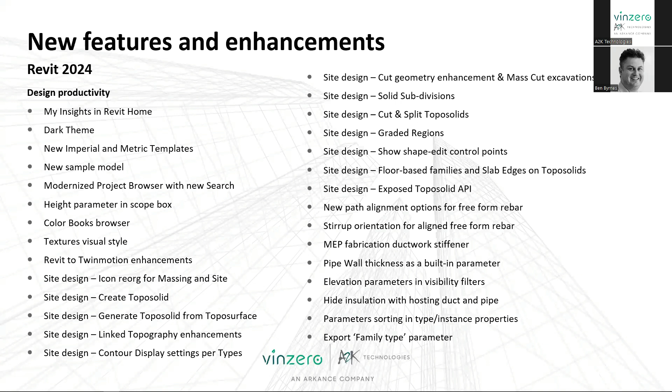One of the main things is the site design. We're now introducing in 2024 topo solids, which is a great feature. Now we're not really just dealing with those surfaces and then trying to put in cross sections, etc. We now have a fully modeled topo solid, which you can cut out shapes of, etc. It actually does real well in measuring those cut and fills as well now, so you can really get those volumes out accurately. Yeah, plenty of stuff there.

Simulation analysis, so a lot really to do there, I won't really touch too much on that. A lot of improvements in the MEP, like all your loading and stuff like that. Also a really big focus on the energy and sun settings and stuff like that, so a lot of that Naviz stuff, which I don't really go into too much. And cloud data - it works better with models, etc. You can actually point snap for those coordination models and stuff like that.

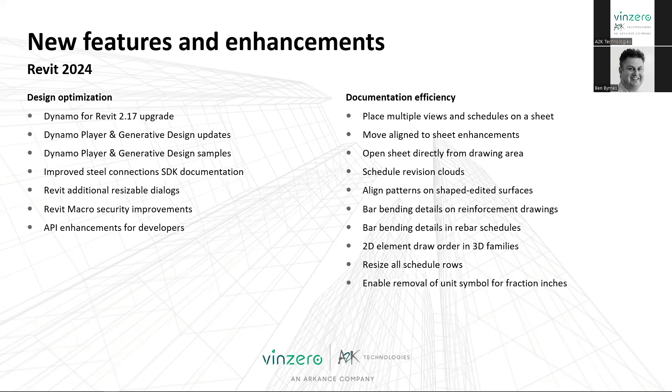Dynamo has improved again, it always does. It's open source software, pretty fluid. The steel connections are better than they have been before, and a lot of improvements in the reinforcement as well.

So a lot of that bar bending and so on can now be added in. Going into a little bit more detail, this is what I was touching on about those insights in Revit Home. On the home screen, you can really get those personalized insights on what you're doing.

You can see there, it shows a little graph of, okay, you spend 20% of your time doing model stuff. And so it really tries to improve your knowledge as well.

One thing that I love in the new Revit is they've actually got new sample projects, and the new sample projects really show a lot of best practices, and they do have a lot of learning resources in the actual sample projects. So I definitely recommend checking them out.

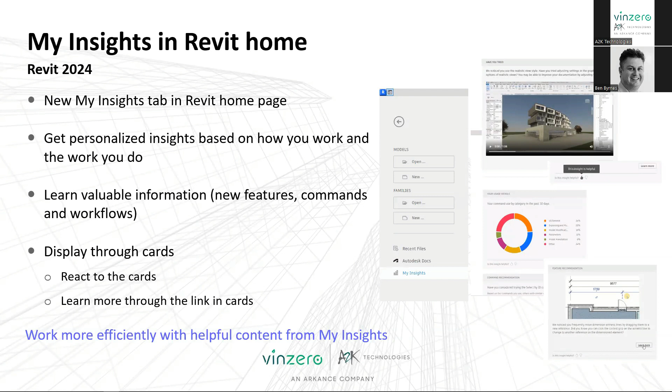The dark theme - as you can see there on that little screenshot, you can pretty much make it look like AutoCAD, which, to be honest, is probably a lot better on your eyes than the stark white. Sometimes I change it to gray, like have a very light gray in it. But yeah, the dark theme's quite good.

Probably should have been something they had 5 years ago, to be honest. I probably would prefer it, but I'm probably a bit too set in my ways to go for it. But yes, it does have the dark theme, which is great, and to be honest, it's probably about time.

They've modernized the icons as well, which when you do open 2024, it's one of the first things you notice. You go, well, this looks a little bit different. All the icons have sort of just changed very subtly, but it does look a fair bit different. It's a lot more modernized, as they say.

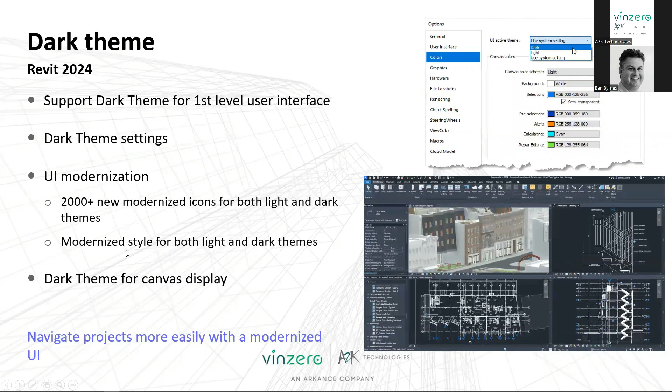New sample model - so this is what I was just talking about. The new sample model and project templates do have that multidisciplinary data set. So you've got an architectural data set, a structural data set, all based on the same project.

As you can see there, it's quite a good little infill site, which does actually have some existing facades and stuff like that, and a new bit. It's even got a point cloud in there. So it's a real good sample project, to be honest. I'm still exploring some stuff in it. It's great, it's sort of got everything in there, really good best practices and stuff like that.

So yeah, it's got the full set of documentation and guided tour, and it does have the imperial and metric templates as well. And like it says here, it does sort of allow you to discover those best-in-class BIM practices. There's no hiding in view, for instance. It's a very well done project. Of course, people do have some slightly different ways of doing things, but it does really show those best practices.

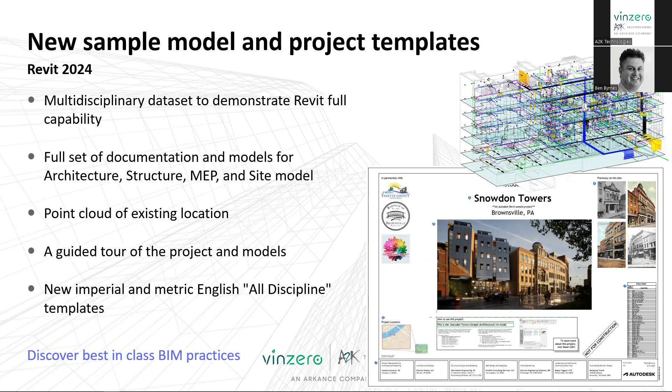The modernized Project Browser with new search - so it does have the search at the top, which is a little bit more accessible. For those of you that are quite familiar with Revit, I'm sure we all know how to right click and search, but I think it used to be almost like a hidden little feature. You'd sort of show it to people and they weren't aware of it. Where now it sort of does have that really at the top.

And if you're not using search in it, use it now. It does make life easier, particularly when you're looking - I always find it's useful for when you're looking for the embedded families that are sort of in the title blocks or the view titles themselves. If you're trying to look for that exact family name to then go in and change the font or whatever, that's where you really use it. So the search feature is really good.

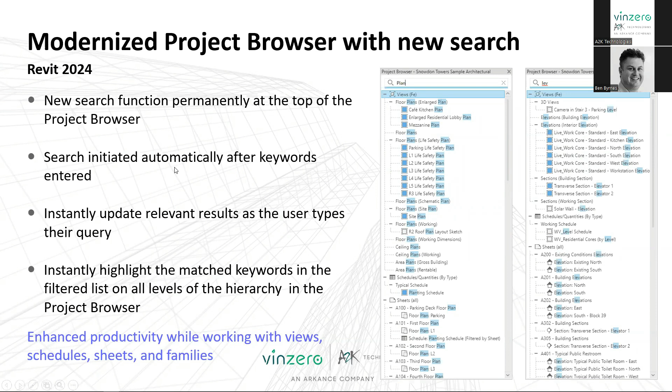Site design topo solids - this is one of the major improvements. There's no more building pads. So for those of you that have always had that frustration with building pads and trying to do surfaces, using surfaces instead of solids, the topo solids is one of the main improvements.

As you may or may not be aware, there is a hack if you do have that - you can't now do building pads anymore. That feature has been turned off now with the topo solid feature. But you can always, if you do have an old project, bring that in or use that, and you can always create similar to sort of hack that. So you can still create a building pad, but with the new topo solids, you wouldn't need to.

Do reach out, we do have a bit of a white paper on how to use topo solids and how to really get that benefit from them. It's much better. It takes a little bit of getting used to. It just works like a normal mass, I suppose.

It's a great new feature.

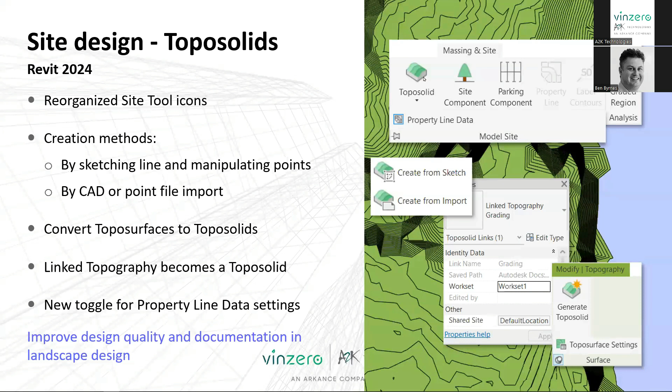Topo solids properties work very similar to walls. You can put in the grass layer, the gravel, then the earth, and then start to cut through that. You can draw sections and it will show that as well, so you can build that compound type topo solid with a layered structure, and you do get the slope, the volume, etc.

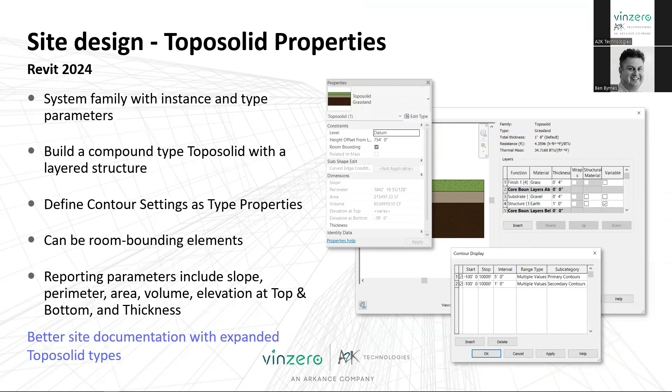It probably goes more into the cut and splitting of these solids on the next slide. As you put in your tunnel or your cut, the building pads are now retired, but you can still edit the boundaries of it. You can cut it with walls, floors, structural foundations, etc., and you can still use the split tool, similar to what we did with surfaces, to separate that into the separate elements.

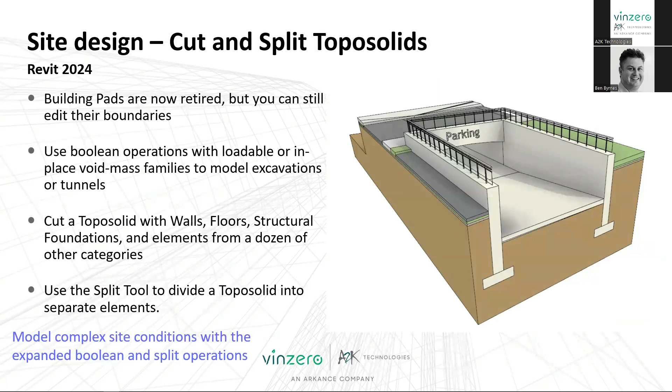Graded regions - again this is all to do with that topo solid stuff. You can actually calculate and report cut and fill volumes out. This is a bit of an American data set, so it's all in cubic feet, but you do get those net cut and fills, etc. Real useful for that.

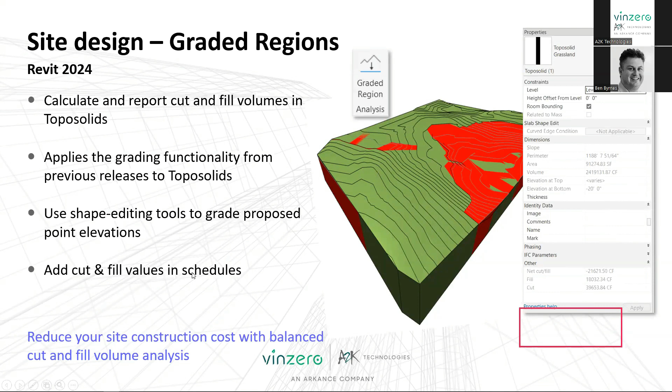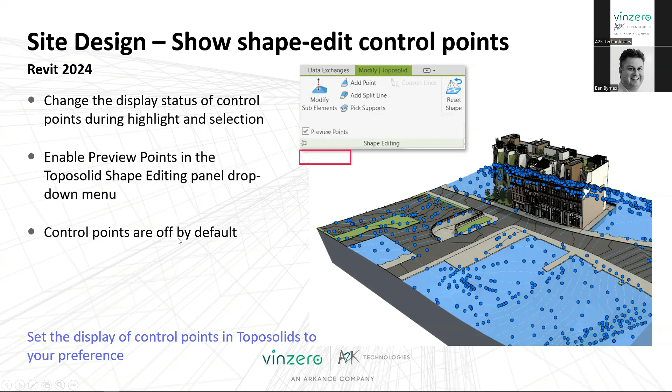We also have the control points. Similar to a topo surface, it's probably more comparable to editing the sub-elements on a slab. It works quite well with that and ties it all in, so you can control those points. They're off by default, but you can turn them on and adjust them, etc.

Car parking, handrails, etc. You can see how it's getting out, and you can get a very accurate view of what's happening with your groundwork. So this is great if you do a lot of landscaping stuff and that.

I know that we're more structural guys, but when I did tunneling for Metro Martin Place, this would have been great. We really had to use a lot of workarounds, where now with the topo solids, you can deal with it a lot better.

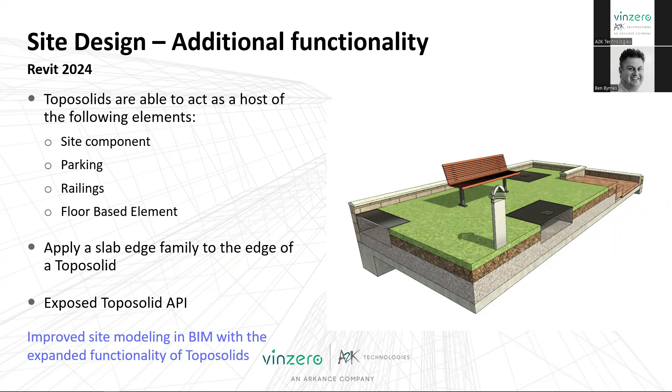The rebar - that's improved a lot. You now have bar alignment options with freeform, and you've actually got the alignment parameter now. It really just makes it a bit more refined - some of the clunkiness is being removed, and it works a lot cleaner in 2024.

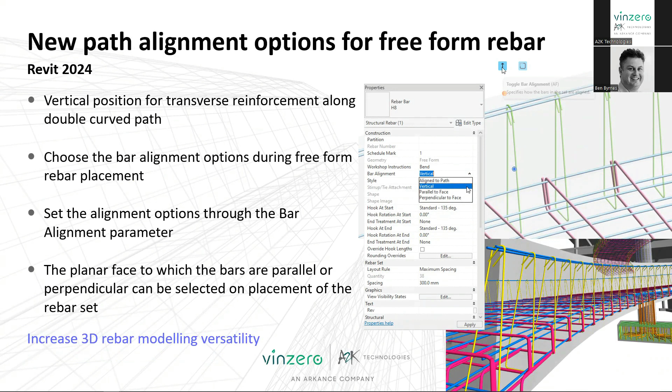The same with stirrup orientation, so you can easily toggle those stirrups, making it quite easy to get all that rebar in. But one of the more important features with it - which it didn't actually go into there, I hopefully have another slide later - is more your bending shapes and all that, etc.

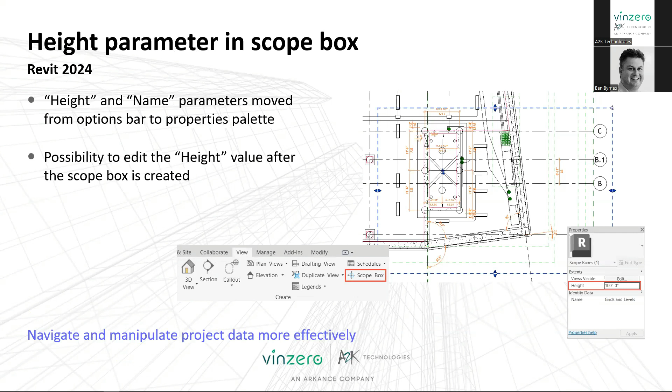It works very well - height parameter on scope boxes. If you're using Dynamo as well, you can start to set the height of the scope boxes now. Before it was like the old cube that you just stretched up the points, now you can really put in that height, so you can make it a lot more accurate and amend that easier.

This is a very minor one - basically they've changed when you add in the project parameters, they're now done alphabetically and not by the order you created them in. Again, a small fix, but a welcome fix.

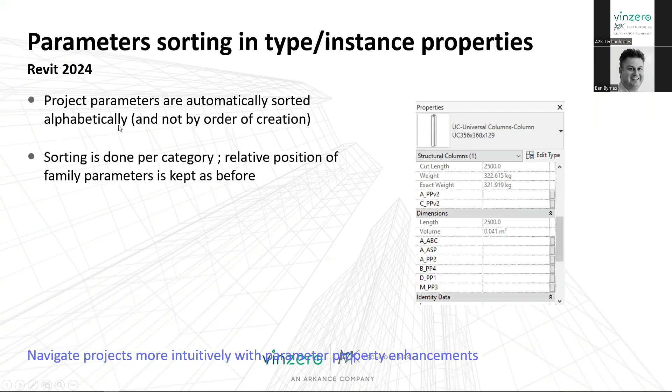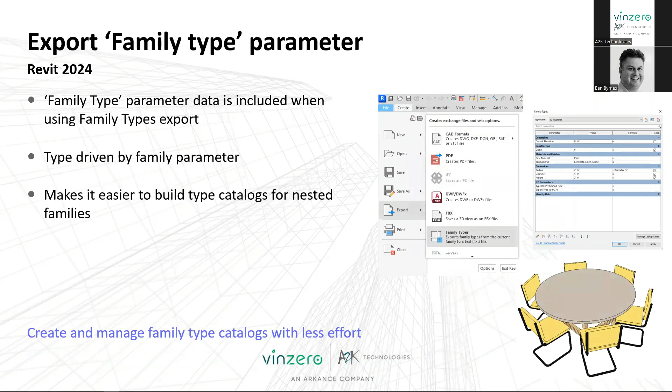You can export the family type parameter, so that does make it a bit easier for those type catalogs, etc., to get that type parameter in there.

Analytical loads - so the loads can be applied a lot better. There's a lot more features with the line loads, area loads, etc., and the real position point where you can point it a lot better, so you can point those loads anywhere. It's really tying in more, making that cross between your engineering software and this a lot easier.

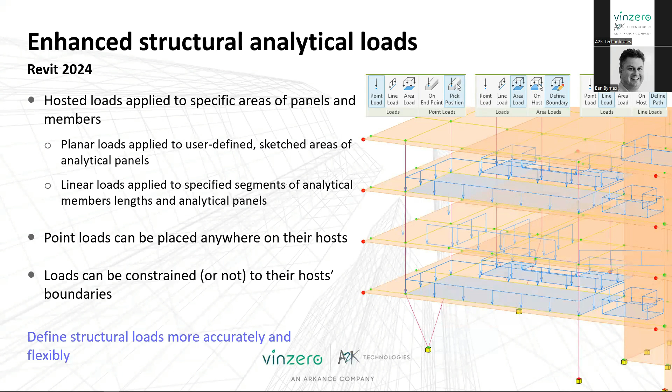Before it was always a bit clunky, but now it's really getting to that useful point where we can actually specify exactly where those point loads are going.

You can color code those loads. We all remember our load drawings, so we can now color code them.

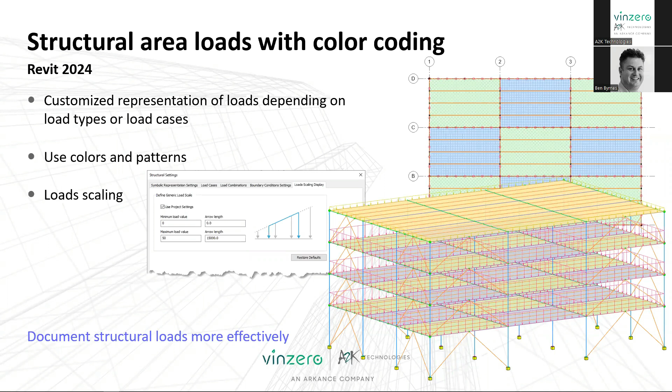Yes, we can change, which we were able to do before, but now you can group it and make it work a little bit better. You can see there how we're changing the points of where those loads are going, from the very bottom of the column, to exactly where the bearing point is on that foundation. So it's not going directly through the center of the column. It's going more how the load naturally travels.

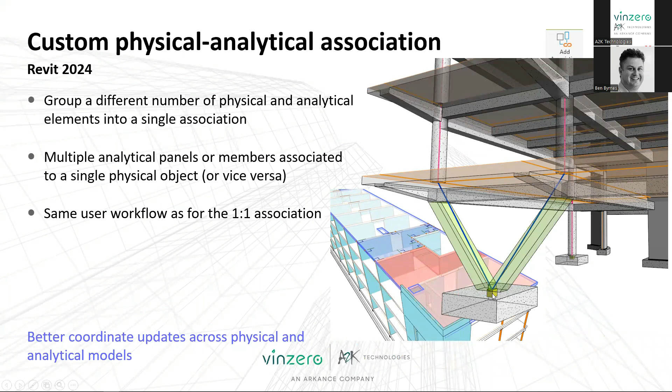Detailed results for your automation. This is where you can create a log of how you're doing your connections, so that you can then use them and create them quicker, and definitely propagate them through the building a lot quicker.

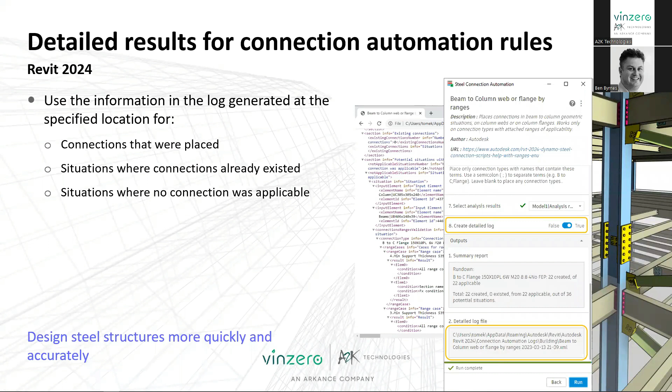Some stuff on cloud data and the interoperability now. We don't have many more slides to go, so just letting everyone know that we're probably another 5 minutes of slides if you can bear with me.

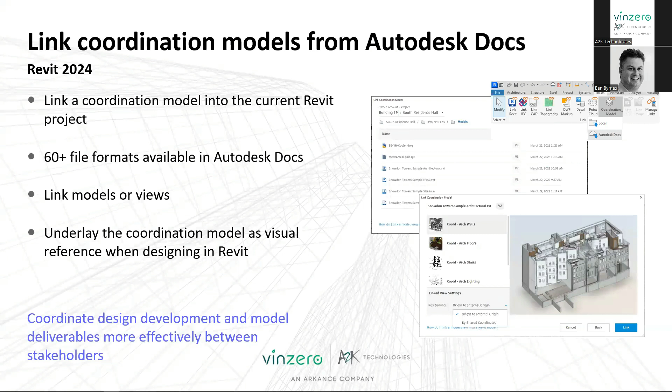We can link the coordination models directly from Autodesk Docs. I'll bring that straight in, 60 file formats, link the models, view, and underlay that coordination model. That also allows you to get the properties of those coordination items a lot better as well. You've got access to the properties of those coordination model objects. You can see how you click on it, and it's basically giving you all those properties. Of course, you can't change them because it's the coordination model.

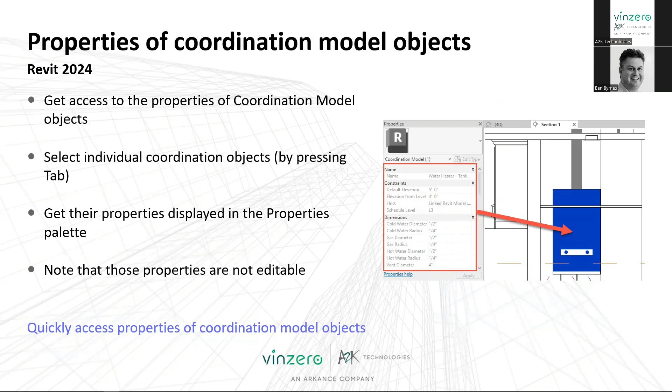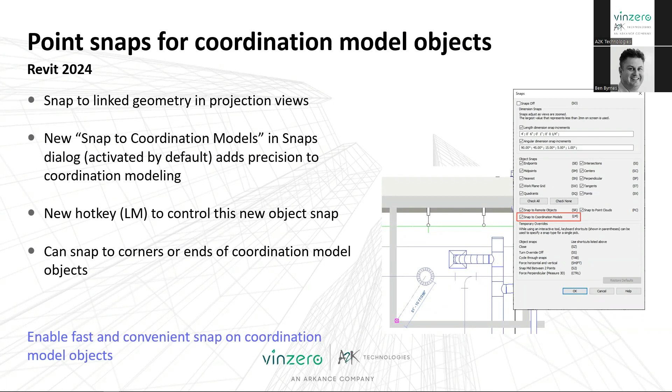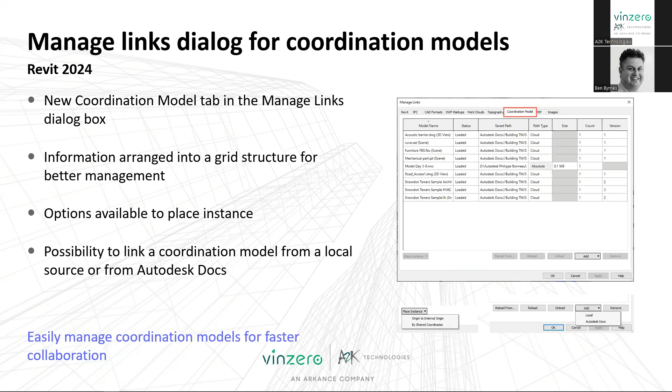And again, you can directly bring that across from Autodesk Docs.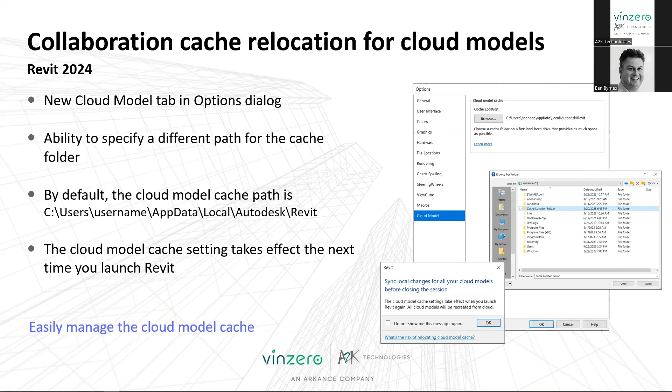So we've got the collaboration cache for the cloud models, so it's gone to a new position here. You can see where it's pathed to that, and yeah, so you can easily manage that cloud cache. Probably not a major new feature.

The robot link has been enhanced as well, so it transfers across a little bit cleaner than it has in the past. Some small improvements, small and welcome improvements.

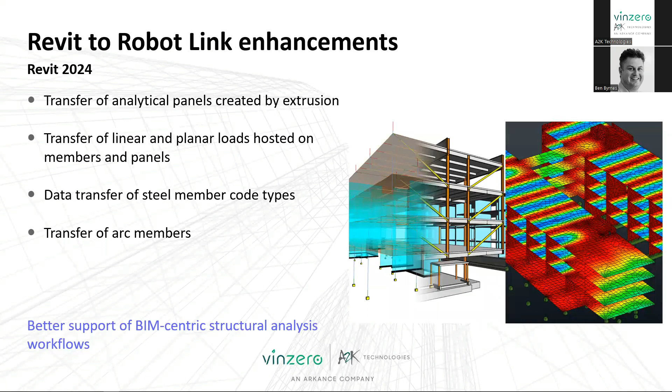The design optimization, Dynamo, again like I said, has improved. It did go through a major UI change coming into 2023, so if you have been using 2023, you're probably already aware of sort of the major change that come through with Dynamo there. But it has brought in further changes where you can bring in the nodes a bit better. So the Watch 3D node is a little bit better, and default font sizes for group styles and things like that. Yeah, so it's just slightly improved, nothing really too major.

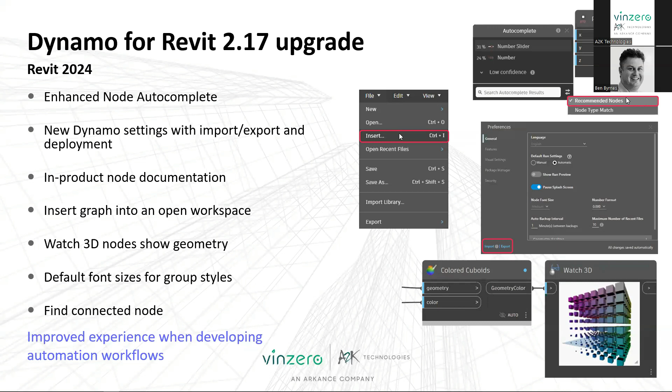There's been some updates to the Dynamo player with an issue manager, which shows the warnings a little bit better than it used to. Instead of just not working, it will actually show you what package isn't working, which one's missing, and a few of the warnings. So it just makes it a little bit more useful.

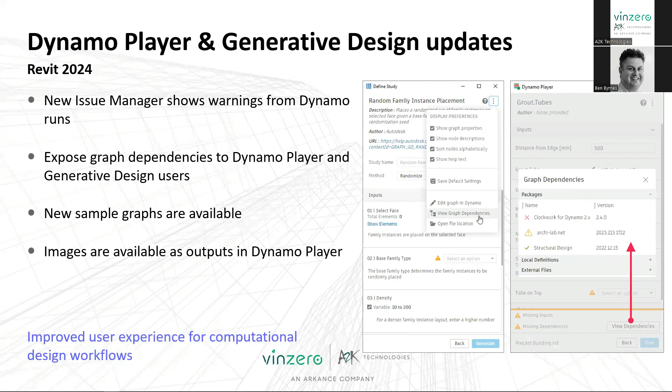Again, the reason for Dynamo Player is to make it more approachable for people who are not so comfortable in Dynamo. This is probably improving the link and giving a bit more of that further information. But at this point, wouldn't you just open it up in Dynamo and try and fix it? But at least you're getting a bit of an alert of what's happening in there.

Resizable dialogues, a small change, but very welcome. A lot of the ones where we always go, geez, I wish I could make that dialogue a little bit bigger - you can now. So you weren't able to do that before on edit the label and the work plane. Work plane, let's be honest, you probably don't really need to stretch that box out. But if you did have a very long save selection name or something in there, being able to stretch that out makes it a little bit easier. So now it's offered across most of the dialogues, where before it wasn't. So these are small improvements that improve your user experience.

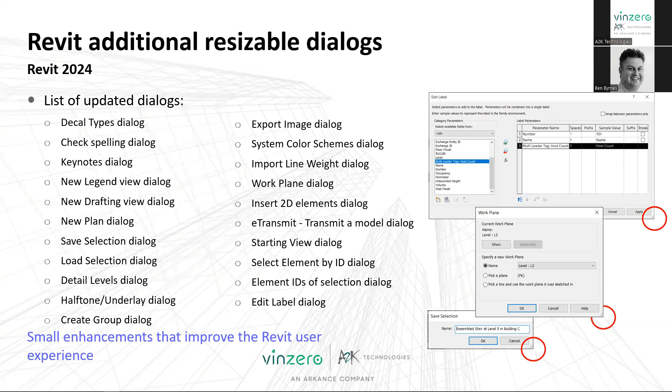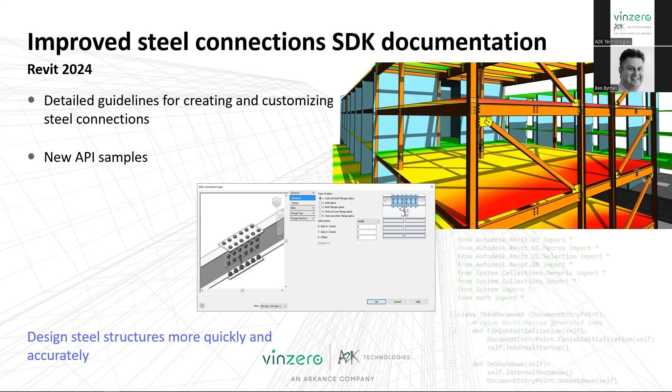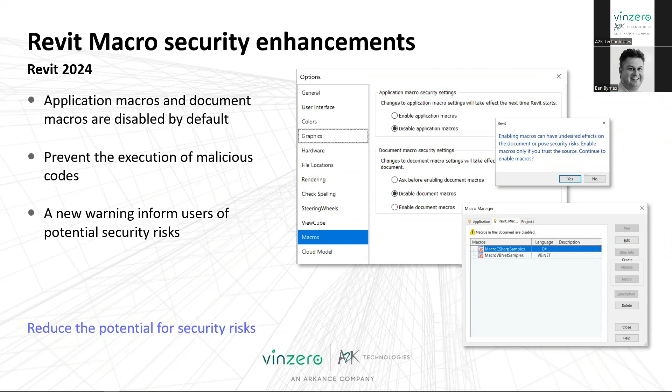This is probably a minor one - I won't even really worry about it - but they have done some background security enhancements where it's cutting down the macros a bit more. Probably not really worth worrying about that one.

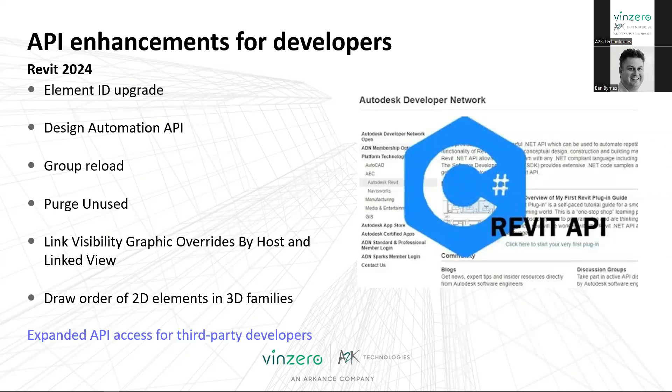There are some improvements in the API as well, just a few extra ones there. The draw order of 2D elements in 3D families - before you weren't really able to do that. Now you can actually change the draw order of those 2D elements in your 3D families.

Lastly, just a couple more slides on the documentation efficiency in Revit 2024. We can now place multiple views and schedules on a sheet - you can select multiple ones and drag them straight from the project browser or from the select view dialog. Again, something we probably should have had a while ago - a lot of people are using add-in programs for this as well. But now you can drag those sheets on.

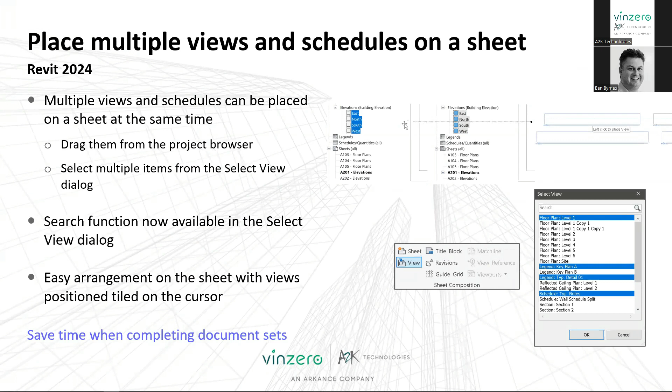Remember that you can always duplicate the sheets as well. So once you do set it out, it also has the align to sheet placement as well, where you can actually align the views a lot better. You can move multiple elements between the sheets while actually keeping your original positions. This is all your sheet-based elements like views, schedules, detail groups, annotation elements, images, etc. They can be moved and aligned together directly from the sheet drawing area.

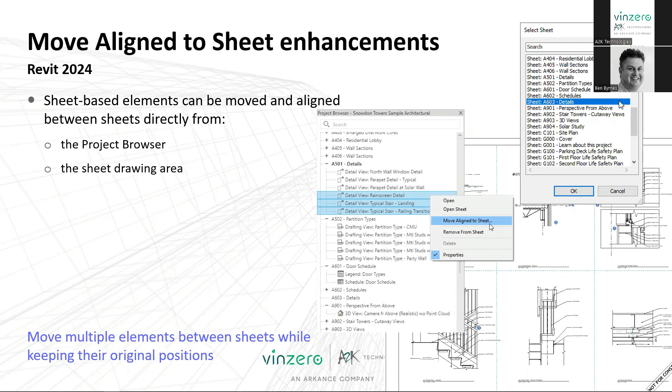Open sheet directly from drawing area - there is now an open sheet toggle. Again, quite a small improvement, but it allows you to open the sheet quite a bit quicker rather than going across to the other one. So there is an open sheet command where it will take you into it. You should probably never try and really work in the paper space, as we used to call it in AutoCAD - always try and work in the actual view rather than the sheet.

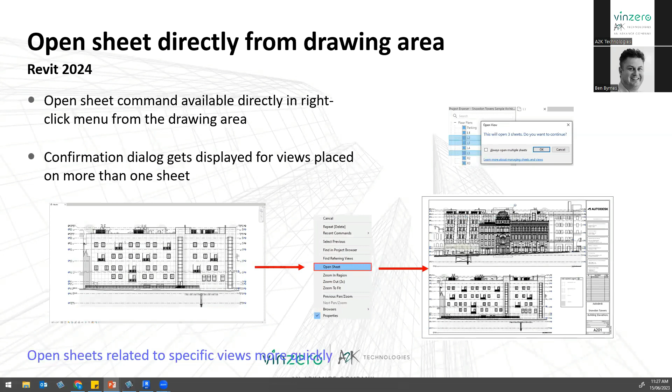For obvious reasons, we can schedule in revisions now, so it's something you will notice - do check it out. The revisions are now schedulable, so it does make a bit of a difference in how you're using them. Just be aware if you are using projects from before this, the way revisions work is slightly different - do make sure you test it and find them. It is an improvement to easily track them, but it is a difference and may make some changes to your schedule. If you have revisions on your title blocks, as most of us do, you may find you now need to add a schedule in there to really pick up how it's doing it. It may muck around with your revisions, so just be aware of that, please.

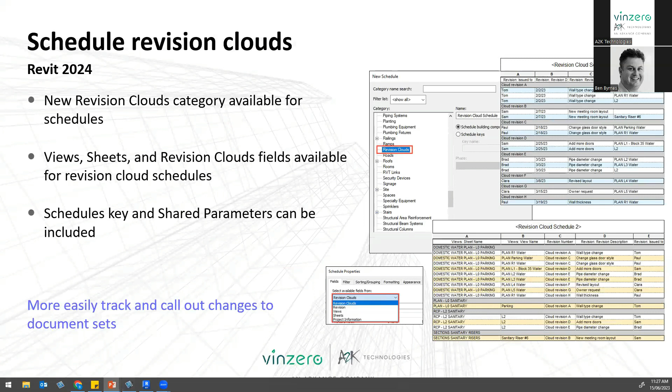Bar bending details on the rebar drawings - yes, we can get those real bar bending details now, which are important, especially if you're doing some more stringent reinforcement work for some items.

I should try and shut down that taskbar, but let's not worry about it. Hopefully it's not bleeding on.

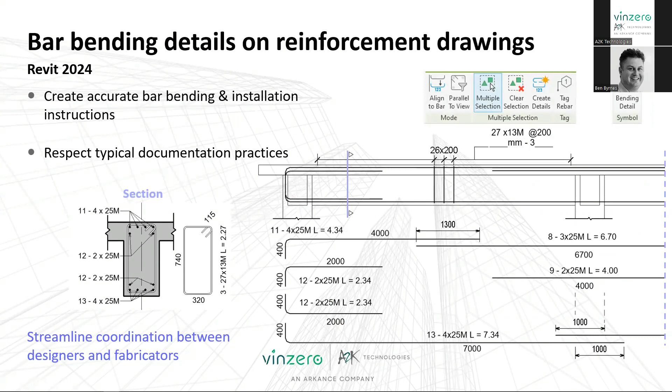So it does put them on the reinforcement drawing. You can see now you will get those bar bending schedules and lengths, so you can really produce more reinforcement drawings and bending schedules, so you can get them out. Real good. If you're going more into that finite bar bending details and reinforcement scheduling, you'll find these improvements welcome.

You can choose between showing the rebar parameter names or the actual values of the segment lengths. Similar to the images, the bending details are only visible when the schedule is placed on a sheet.

The other thing I was talking about before is that 2D element draw order in 3D families. In previous versions, the way 2D elements were displayed was inconsistent, for want of a better word. They've improved it so that you can display it consistently everywhere. It was something people found a bit painful, where depending on the print you did, it just didn't sit right from the project to vector print, etc. Now you can see that it's been streamlined, for all the family categories, so it'll allow you to have that consistent visual appearance.

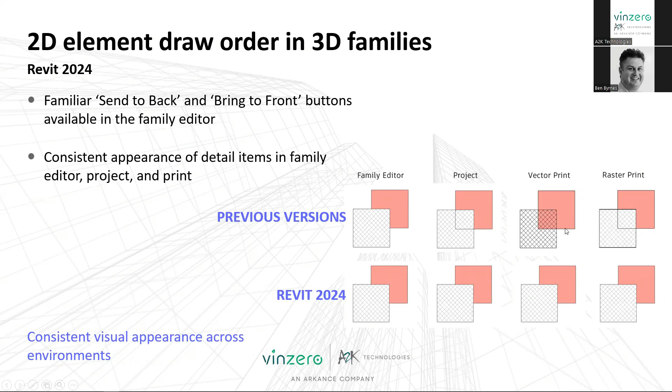Resize all the schedule rows. So yes, you can now resize all the rows in a schedule based on placement on a sheet to clearly represent the context. There's a resize rows parameter, and you can resize all of them and give them the height, etc., and make them all match very quickly. Just a small improvement, but again, quite welcome.

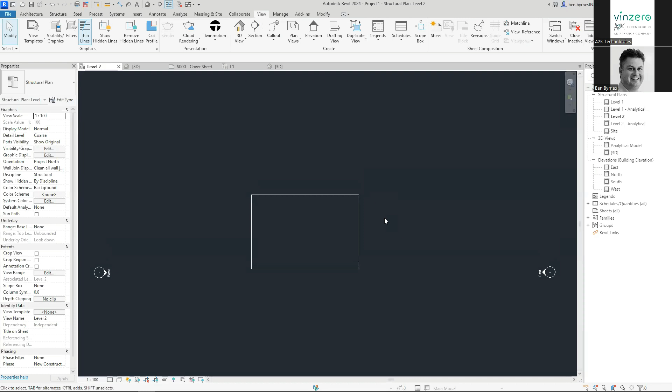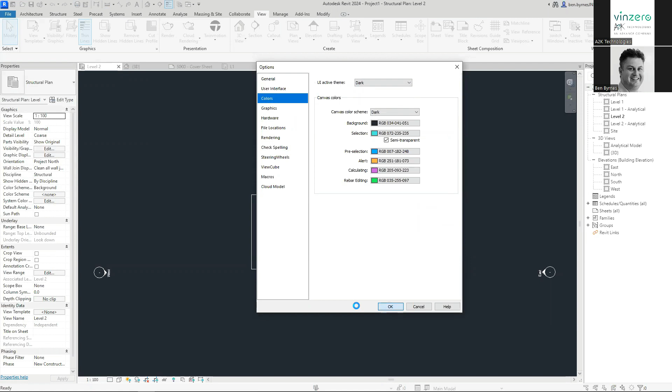If you've come from AutoCAD land, you'd probably find it a bit easier to work with. If you wanted to change the actual UI, the user interface, as well, you can go under your options, go to colors, and change the UI theme there to a dark theme. You can change it all to dark and apply it, and you'll see how that really changes the whole screen to dark. Pretty easy and simple to do.

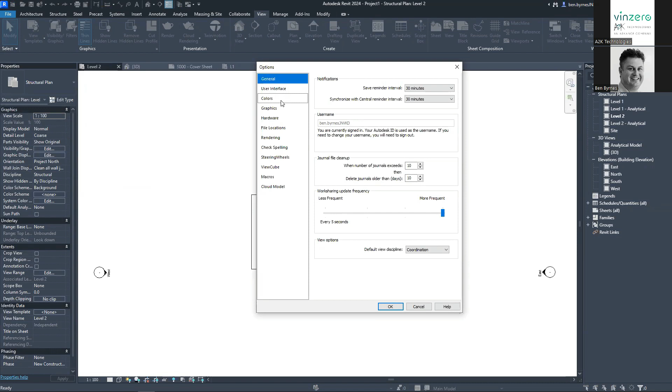I think I'm going to stick with the white one though, to be honest. But you can see how it's quite easy to just flip between the different ones. I think once you've used it for a little bit, I'd probably be tempted to go black, but yeah, I think I'll stick with what it is at the moment.

So that's that - again, the Twinmotion, just to point that out. That came in 2024, and it does have a bit of better tie-in with that.

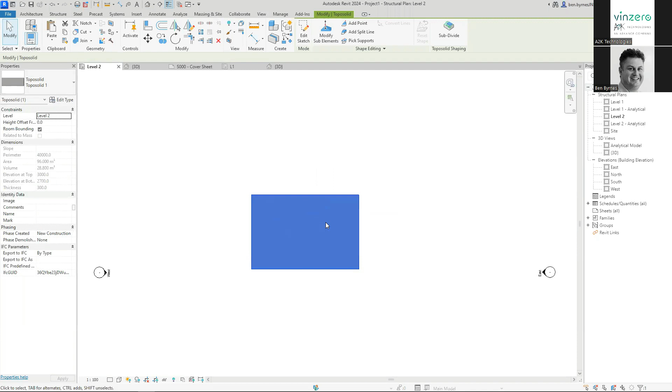I have put a topo solid in here. I've only just used the basic one that sort of came from it, so it doesn't actually have any grass layers and stuff on it. It's just under your massing and site tab, and you now have a topo solid here.

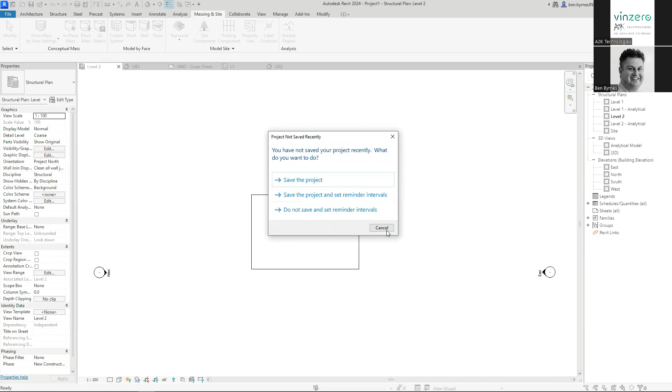You can create that yourself from a sketch, or you can create it from an import and your CAD from before, so you do have that there. That's how you can create it, and create it from an import. I don't actually have an import ready to go, but if you've got your CAD or your CSV, you can use it and do the layers similar to how you did before.

Creating a topo solid, you'll see it's pretty much the same as just creating a floor. So yes, you do have your normal draw commands here - you can draw that in and place your topo solid. Again, probably not very exciting.

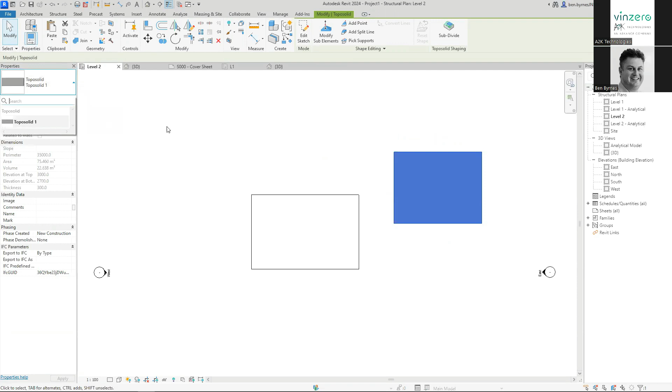I've only put a square solid in there, and I've only got the one type. This is just a basic template, so it doesn't really have much of a type in here.

If I did come in and edit the type of that topo solid, this is where I can then start to change the structure. Very similar to a wall, you can create the structure, then go to your grass layers, etc., so you can create those different layers.

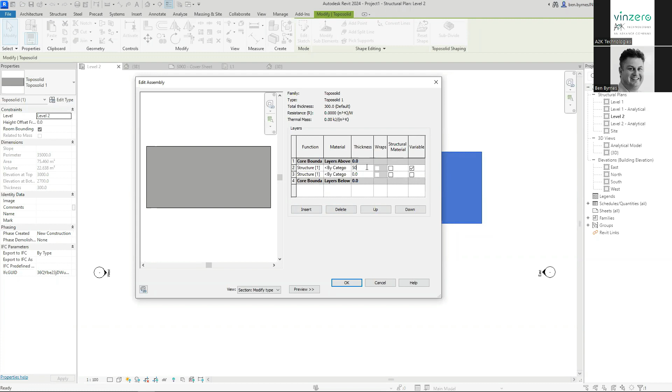I'd probably move that up so it's outside the core boundary, and that's where I could have like a 15 or maybe a 50 mil of grass, for instance. So come into the material, and yes, should have grass in here somewhere - maybe I don't, I don't do enough architectural stuff and landscaping stuff. I'm sure I would have it in my material library somewhere.

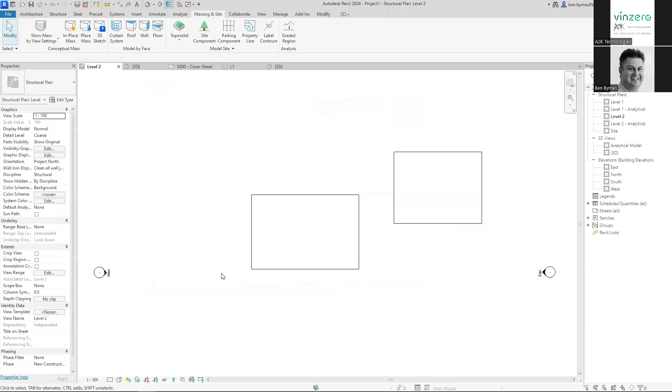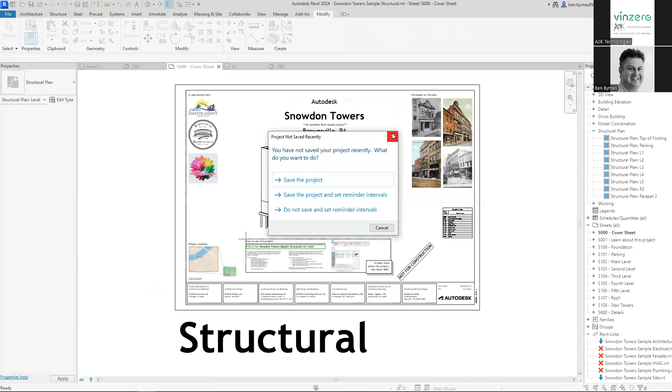I do also want to show those sample projects as well - I actually have one open here. This is the structural sample project, now called Snowdon Towers. They've got like a few images and stuff like that.

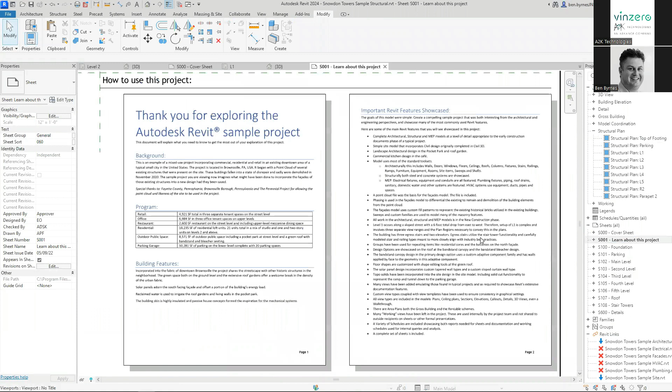It's quite good - they've got a 'learn about the project' section, and this is where you can really go and it'll show you what it's using in the project, like the point cloud for the facade, and it's using phasing as well. So it's really got a lot of those little things you may not be using, and you can use this sample project to really go through and see how they did stuff.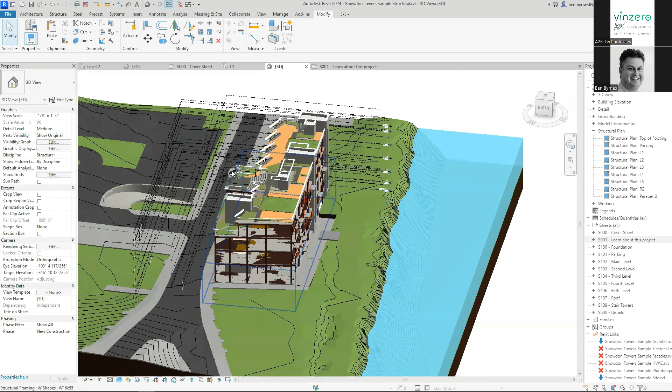One thing you can notice if you go to the 3D model, which I've played with a bit of topo solids here, so we can see the 3D model here. Let's select something to orbit around it rather than just doing a random orbit - maybe I'm trying to actually look at the top there. You can see that they've done sort of a bit of massing at the top here as well.

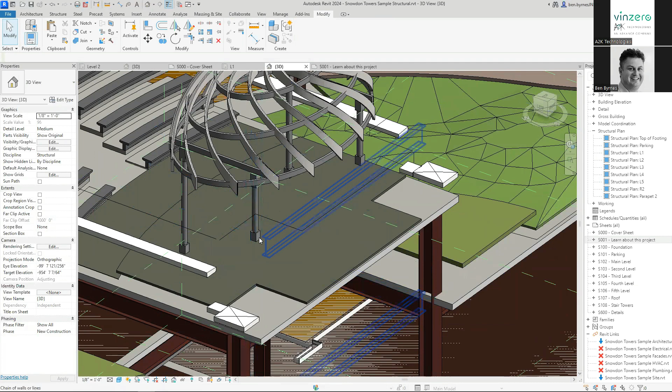So you can really go in and start to look at how they're doing the wall members, etc., and things like that. They have tried in this new sample project to really use a lot of the tools that people probably don't use so much, and it does make it a little bit easier to use and go through.

They've got the generic model there where they've sort of shaped a lot of that out. So yeah, it's pretty good like that.

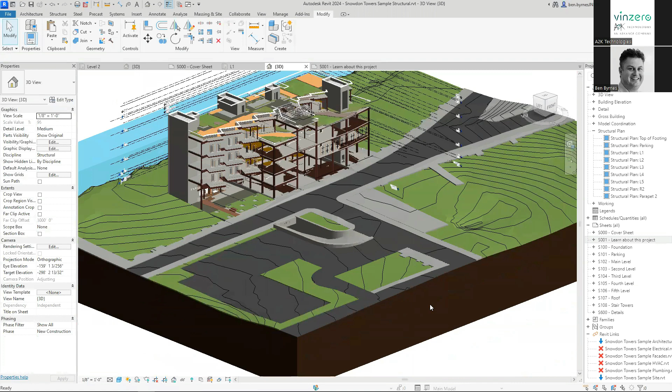This does have the topo solid in it as well, so you can see this topo solid, which I have copied. You can see someone's even put the water in there. I do have a topo solid over here.

If I wanted to select that, similar to when you do a slab, you can modify the sub elements, and you can come here and preview those points. So if I bring that up, that will show me all the points here, and once you do have those points, you can simply select and modify those sub elements.

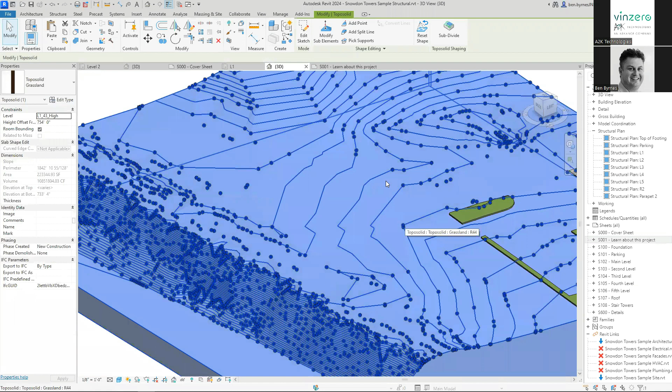As you go through, you can select a point, for instance, and you have where you're measuring it from as well. There is a metric one as well - you can tell at the moment it's all feet and inches, don't we love it? But I can change that elevation to be from the current level, or from a survey point, or from the project base point, and that will change that height accordingly.

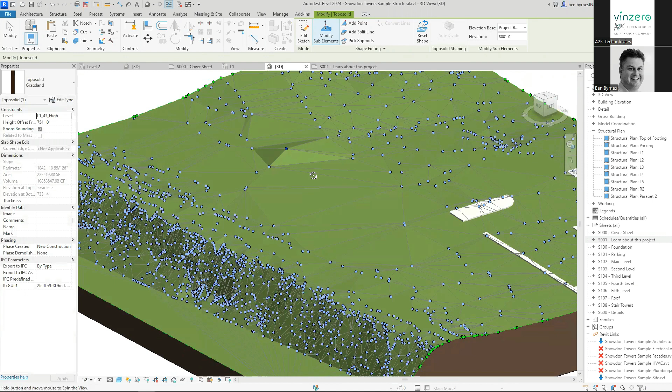So I can simply even stretch that up. You'll see as I stretch it up that the topo solid is changing to reflect that. So that's how you can basically do that as per your normal point definitions.

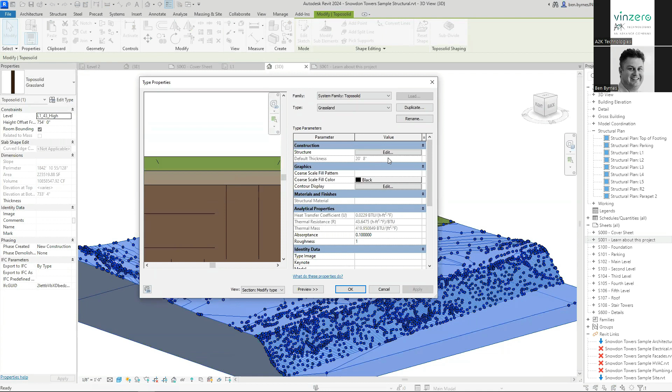You can see this one does have grassland, and if I go in, you can tell how it's actually got three different layers in here. So it does have that grass layer, as well as a gravel layer, and then the earth layer underneath. So it's a lot better, a lot more usable. It does take a little bit to get used to, but you can very easily start to do your tunneling and stuff like that, or if you did have a real cut through it.

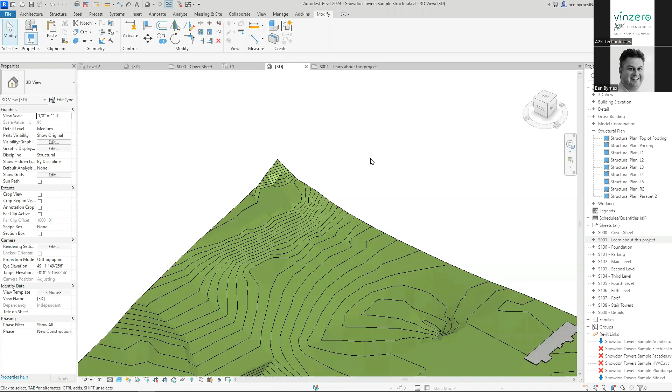It's possible as well to also subdivide that terrain. So if you wanted to subdivide it, you can just put a line in. I'll just put a rectangle in as such, just for that part of it, and finish. And you can see how to put that subdivision in.

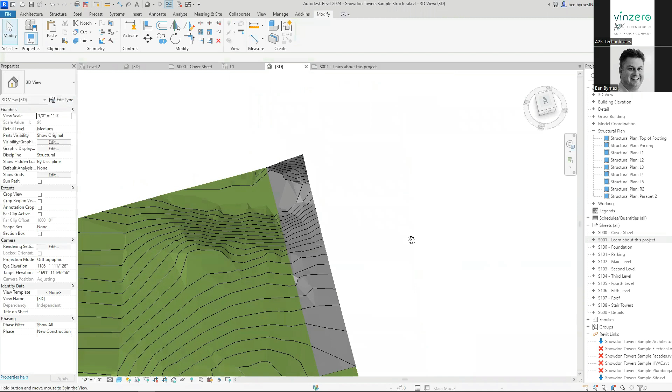I could use this to, it always wants to put it in at a certain height. So you can see how I could quite easily turn that into a road. You can see at the moment it's 1 foot, which is nice and imperial for everyone, isn't it? Let me put that in as 10 inches. And I've got that in there now.

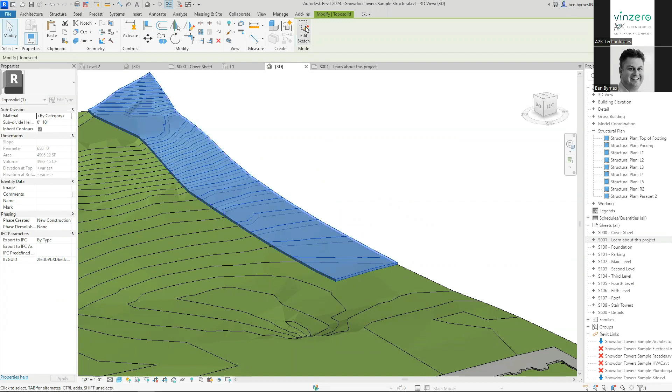And that's another toposolid, which I could easily change to a road. Again, I could edit that sketch, change how I wanted that to view, etc., and drop that in. So it makes it really easy to do those real landscaping ones, a lot of tools that we've been after for a while.

That's probably all I want to really show as part of the live demo. Just that you can see the new search here. Remember that we used to always have to right click and go to the search. Where now it looks like they've actually, well, they haven't, because I'm picking stuff, they've actually taken the search out of your right click tools, which is where it used to be. And now you've just got the search simply at the top.

So if you wanted to search for your view titles or a family, etc., if you typed in, you can see how it's taking you to all those annotation symbols where you could now grab those families and change it through there. So it just makes it a lot better. A lot of people were sort of unaware of the search feature in this, so it's now a bit more obvious, which opens it up to people who didn't use it before, makes it real useful.